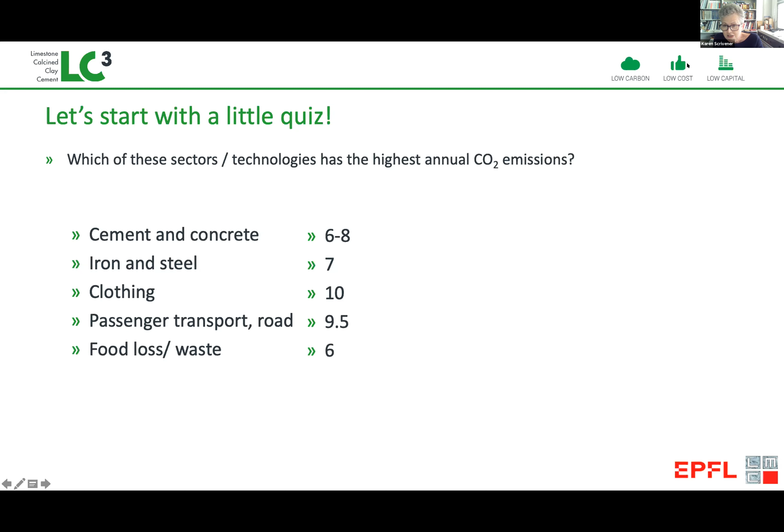Now, I'm not saying this means you shouldn't do anything on cement and concrete—just the opposite, because net zero means net zero. It means all these figures have to go to zero. But I think it just highlights where CO2 emissions are coming from and what we need to do.

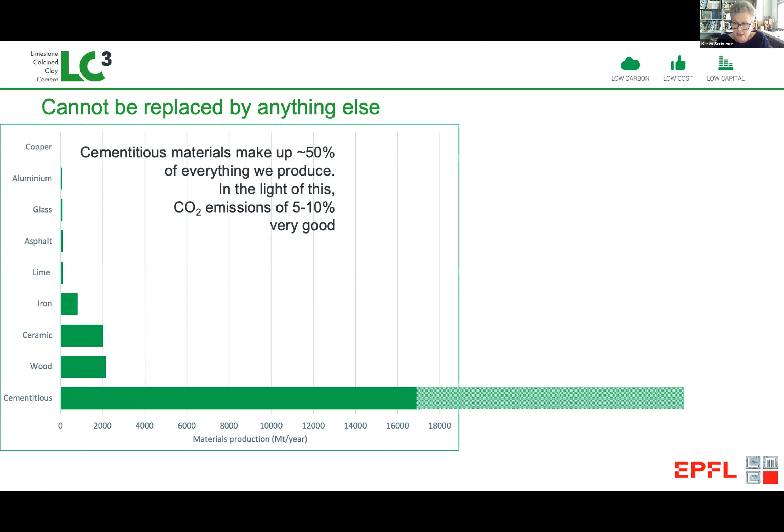Now, the fact that emissions from cement and concrete are so high is purely and simply related to the amount of these materials produced. These were quite old figures we published in our report in 2015, and I think even then they were an underestimate. Today, the estimate of the amount of cementitious materials—that's cement, concrete and mortar—is about 30 billion tons. That's certainly more than all other materials put together, and purely from a resource standpoint, it's clear we couldn't significantly replace it with any of these other materials.

I certainly don't think we should see it as a competition, because we need all materials. People want to promote timber as a solution, and timber can be a very good building material, but we have no means to significantly increase this. If we wanted to replace just 25% of the emissions from concrete with timber, we would have to plant a new forest 1.5 times the size of India.

And this, even if we could do that, which clearly we can't, that would actually have no impact by 2050, because the trees would hardly be grown by 2050. So we need to stop people thinking that timber can just solve everything if we stop using concrete.

It's simply impossible. And more importantly, in developing countries, there's still a huge demand for people to be housed decently. Just in Africa, it's predicted another 200 million accommodations or homes will be needed in the next 10 years. So this is a huge problem we have to solve.

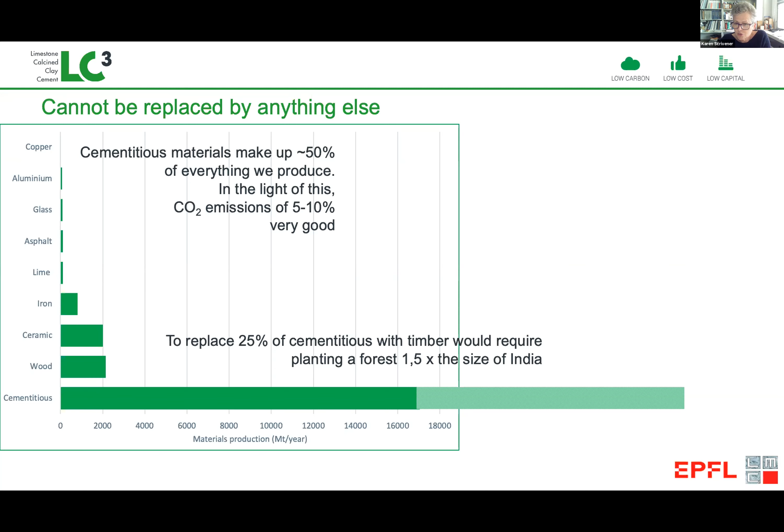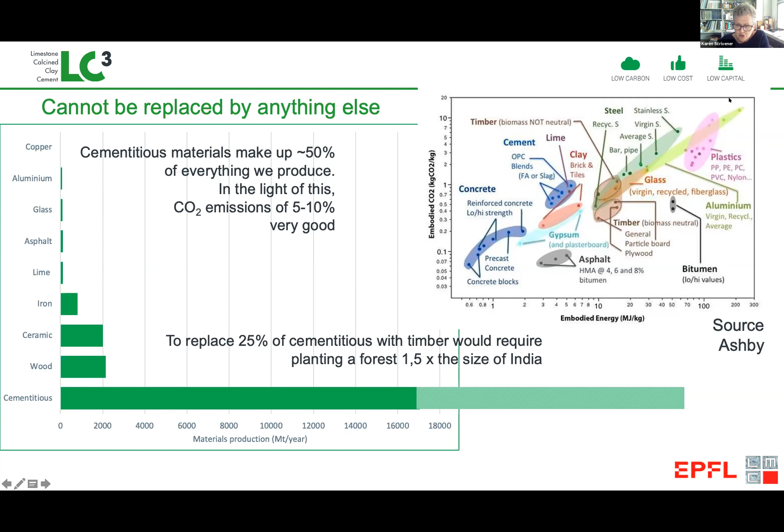And from an intrinsic point of view, we also have to realize that the embodied emissions and the embodied CO2 of concrete are some of the lowest of all materials. These figures come from the book of Mike Ashby, and you can see concrete is right down in this bottom corner. Here are metals, here is timber, here is glass, and plastics right up many orders of magnitude higher. So concrete is essential, but we can do a lot to improve it.

We made a first attempt to evaluate that in 2016 with this UN Environment Report. I think things have changed a lot in the 5 years since we brought out this report, because 5 years ago, the level of emissions reductions forecast to be necessary was quite modest. Now, because we've done nothing, we're in a much more serious situation. We have to go much further, and we really have to meet this net zero. So things are much more serious.

Now, cement is often called the hard to abate sector for the simple reason that the majority of the emissions come not from energy. So this shows you a cement kiln. It looks like a kind of rusty, inefficient old process, but that's really not true, because there's been tremendous improvements in efficiency of cement making, mainly since the first oil crisis in the 1970s.

So very simply, the oil price went up 4 times. The cement industry scrambled to use less oil. And by and large, they've been very successful in this, improving efficiency dramatically, and particularly in Europe, incorporating waste materials, so that in European countries, many plants are operating with more than 80% of waste fuels.

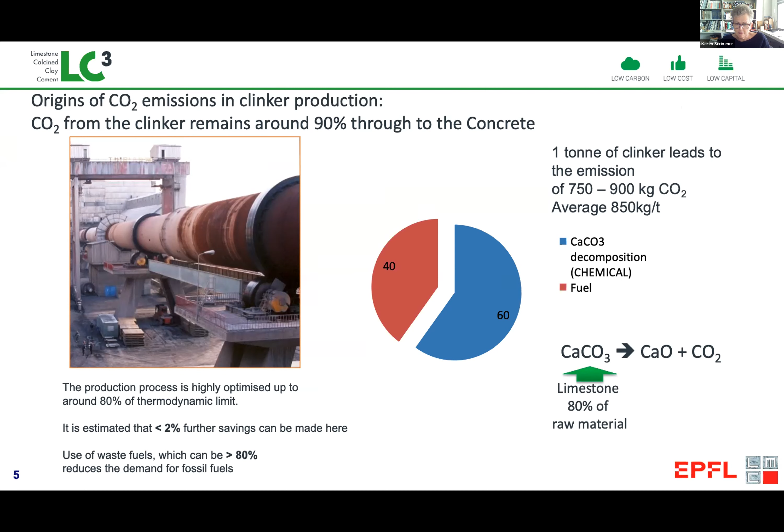So that's not so easy to solve. The other thing in terms of the context I want to highlight is that even today, and certainly in the future, a very small proportion of cement production is coming from OECD countries. We often sit around in our nice, comfortable offices and homes and consider these very elaborate, sophisticated potential solutions. That's not going to address the problem.

We're only going to address the problem if we can provide solutions that can be used by everybody, and particularly in the countries where the demands for homes is going to be so enormous in coming years.

We've seen what's happened in China in the last 30 years, such that China now consumes more than half of the world's cement. This figure is certainly going to decrease, but there are other countries coming online like India and many other countries, notably in Africa.

So today in India, the cement consumption per capita is about 5 times less than in China. In Africa, it's even half that again. So you can see the amount of pent-up demand there is in these countries.

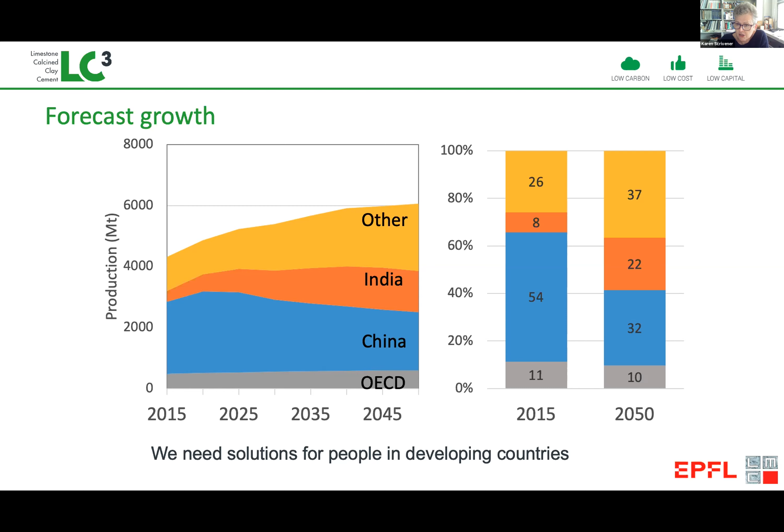And these have got to be the countries we engage with if we're going to bring about these lower CO2 emissions. So again, if we relate this back to how many emissions are coming from cement, it's incredibly varied country by country. United States, for example, which has quite a low per capita use of cement and a very high emissions in terms of energy from transport and everything like that, it's probably only about 1 or 2%.

Whereas in a country like Vietnam, which produces a lot of clinker, and a lot of that is in fact exported, it may be up to 25%.

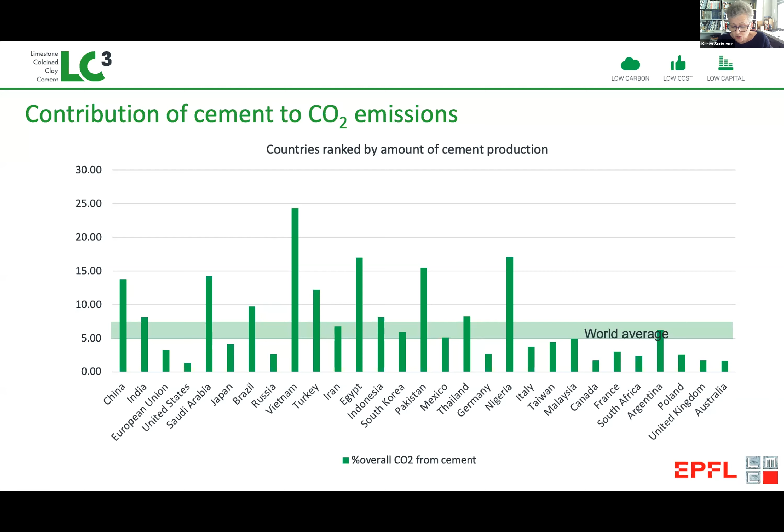I really want to stress the point that there's no one single solution. We need to work at all the different levels if we're going to reduce emissions the way we need to. This shows the value chain: we need to reduce CO2 from clinker production, which has largely been done to the extent possible. We then need to reduce the clinker in the cement, and that's mainly what I'm going to talk about today in terms of substitute materials. We need to reduce the cement in concrete, a very important lever that's been very little studied. I'll say a bit about that at the end, but we can go further.

We can reduce concrete in buildings. We can use buildings more efficiently rather than demolishing them. And of course, if we have to demolish buildings, we can recycle. Concrete is a perfectly recyclable material - the only obstacles are really cost and logistics. In technical terms, every single part of concrete can be reused. In this report we wrote for the European Climate Foundation, we calculated that if we strung together these possible savings, we could imagine reductions of up to 80%.

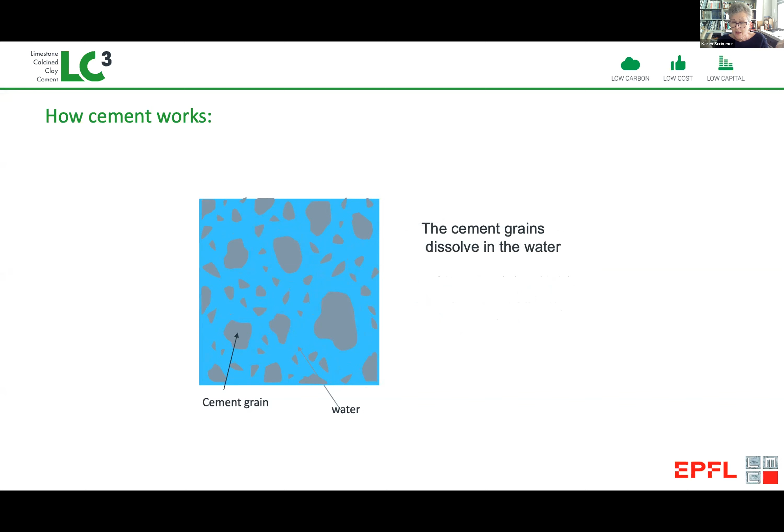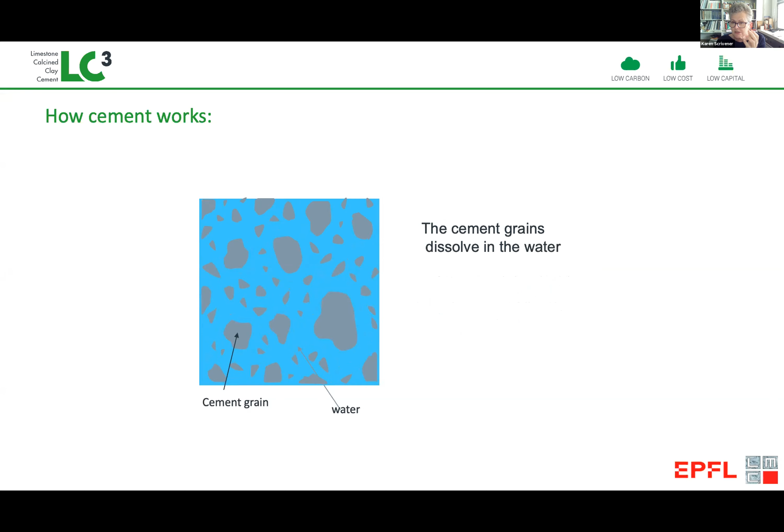What's happening is that those gray cement grains are dissolving - like when you put sugar in your tea or salt in your potato water. But it's very different from salt or sugar dissolving, because the different ions that form this cement can then make new combinations together, and these new combinations of ions can precipitate. The precipitates, drawn in red here, are what we call hydrates. And these hydrates bridge the spaces between the cement grains.

They have a larger volume than the amount of solid that dissolved, for the simple reason they incorporate the water in their structure. So water now becomes part of the solid, and this is why it increases in volume. You can start to fill in the space, but you never completely fill it in—you still have pores there. But that's what gives you this strong and durable solid.

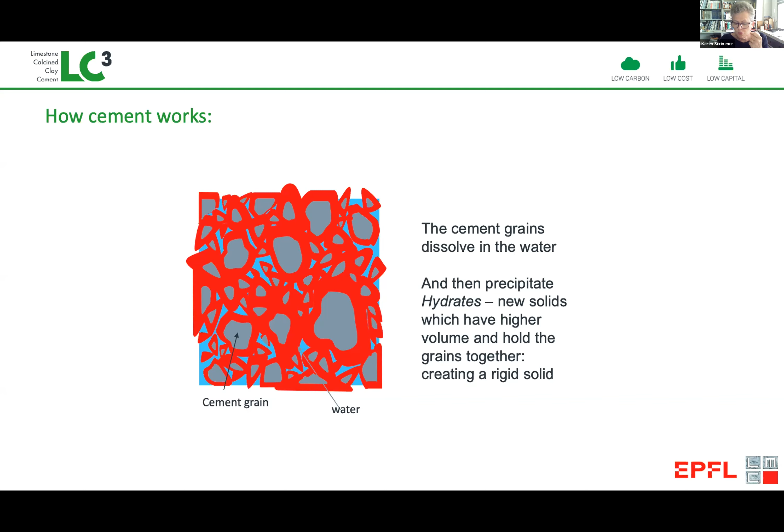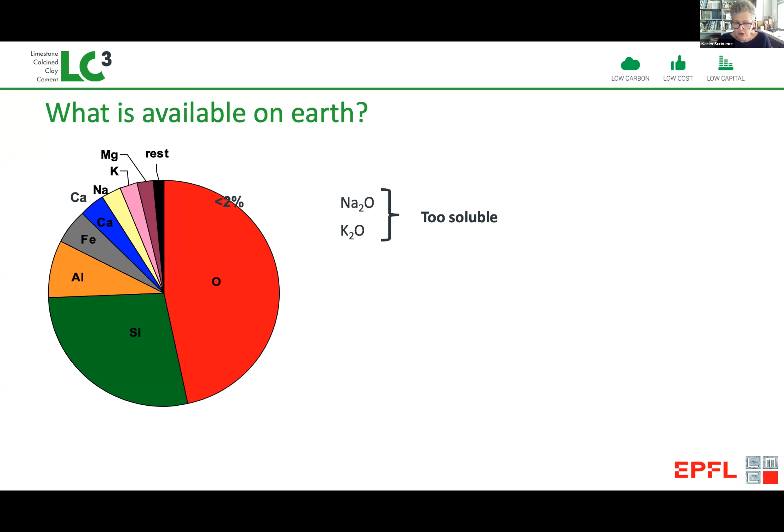So let's go back and look at these different elements. Most of these seven here are actually combined as oxides. If we consider the oxides of sodium and potassium, the problem is these are way too soluble. We know we can make strongly alkaline solutions by dissolving sodium and potassium in water, and then we don't hardly ever get precipitates.

On the other hand, the oxides of iron and magnesium are too insoluble, so they don't move around. If you examine an old cement paste, you can see quite easily all the places where the iron was originally in the cement grains, and however many years you look at it, it doesn't ever move anywhere—it just stays in the same place. So it's not really contributing to this process of filling space.

And the same with magnesium. Even when you have very small amounts of alkali present, it doesn't move around. And if we have a slag cement, the slag is basically staying in the same place.

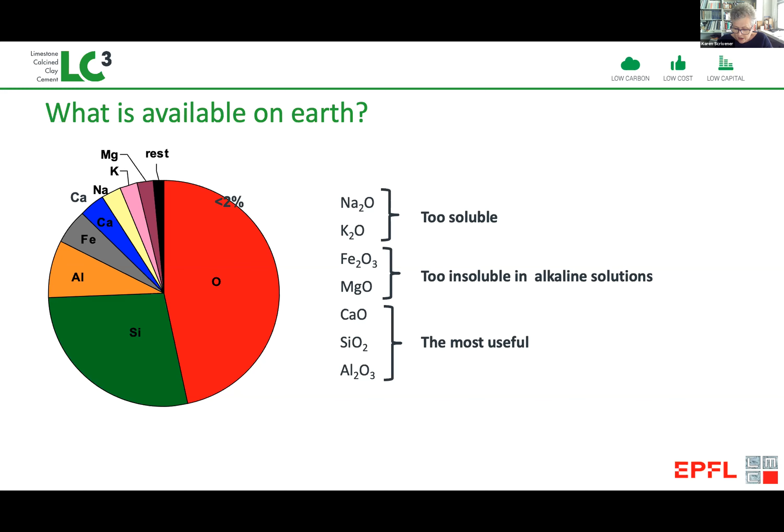So this takes us from the overall composition of the Earth to a system of just three oxides: calcium oxide, silicon dioxide, and alumina. We know this system very well—it's been studied for more than 100 years. And we know that basically there are only two areas of this diagram where we get cementitious materials: this region here, which we call Portland cement, basically calcium silicates, and this region over here, calcium aluminates and calcium sulfoaluminates.

At first sight this appears very interesting because it's much further from the calcium oxide corner, which means you need less limestone. Less limestone, of course, means less CO2. If you produce cements in this region, they can have CO2 emissions some 20 to 30% less than Portland cement.

However, life is not so simple, because to produce compounds in this region we need much higher concentrations of alumina compared to silica, and these minerals are much rarer. We have bauxites, but bauxite is used to produce aluminium, and even if all current bauxite production was diverted, we would still only replace 10 to 15% of current demand.

And then people say, well, there's lots of waste products with aluminium in. That's true, but what people call lots in terms of waste is often very, very small in terms of cement production—and that's the case here. The kind of waste streams that contain the amount of alumina needed are available in quantities which are absolutely minuscule compared to the world demand for cement.

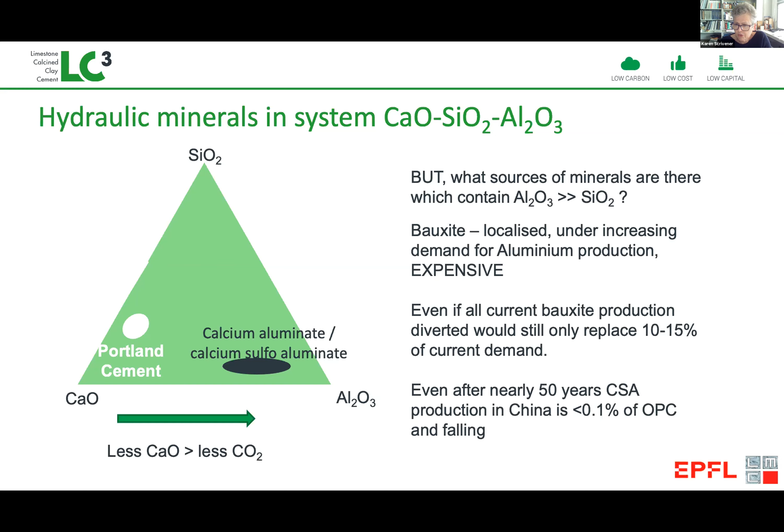I think we see the proof of this: these cements were pushed very strongly in China from the 1970s, but today production in China is less than a thousandth of Portland cement production, and it's actually going down—and that's without talking about the many technical difficulties of these materials.

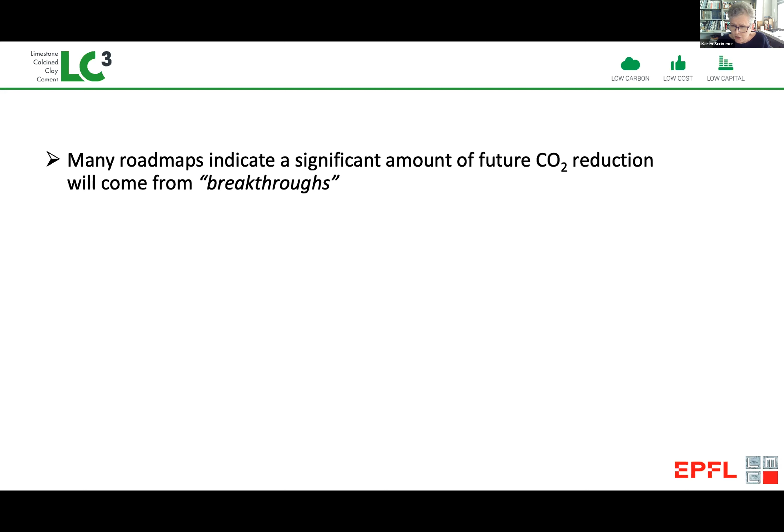So what other possibilities do we have? This is a bit the problem—all these roadmaps people come up with try to evaluate what can be done, and there's always some gap. So they say, well, we're going to have some wonderful breakthrough in the future, or we're going to do carbon capture and storage, which is fine. But what breakthroughs can we really have when we know the composition of the Earth, and clearly that's not going to change?

If we consider cement as a solid material, I think imagining there's something out there we don't know about verges on magical thinking or alchemy—that we can suddenly transform these common elements into something else. We have to realize people cannot live in nano or virtual houses. We've seen tremendous advances in the miniaturization of electronics, but exactly the opposite in terms of houses—people want to live in bigger and bigger houses rather than smaller and smaller ones.

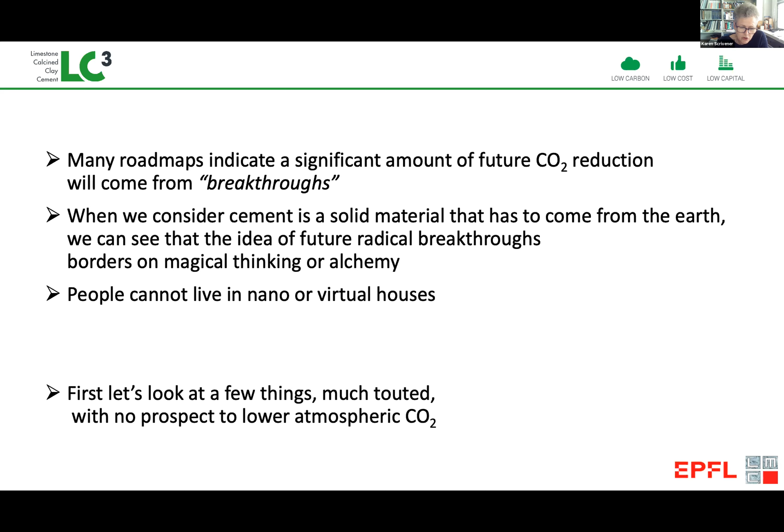There's frankly a lot of ideas going around which border on untruths. One of the most common fallacies comes from this cycle we have.

We have limestone, and most of the Earth's calcium is tied up as limestone or other minerals, which is very difficult to separate the calcium from. During production, that breaks down and gives off CO2 into the atmosphere. Then we have the hydration process, which forms calcium hydroxide. Over time, those hydrates will reabsorb CO2, and the concrete carbonates. But it's fairly clear that the amount of CO2 reabsorbed can never be higher than the amount that was given off in the first place.

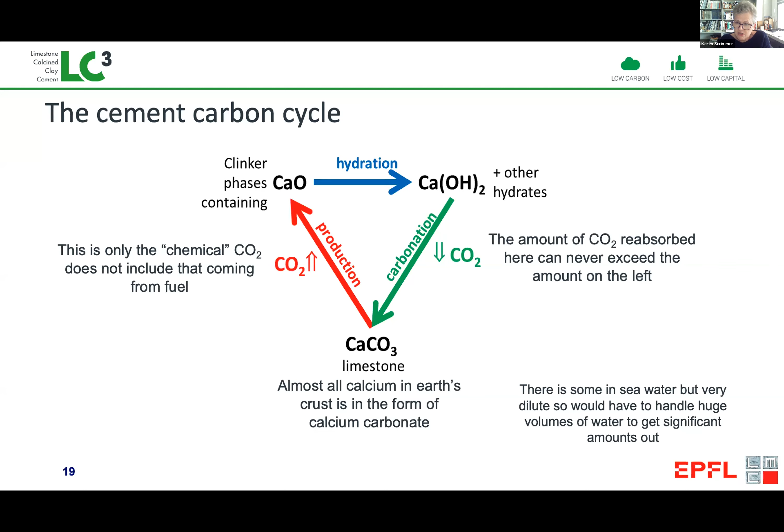Worse than that, we're now in a very urgent situation where we have to reduce to zero in the next 30 years. This carbonation process is very slow, taking tens or hundreds of years. So it's going to have very low significance in the timescale we're talking about.

So there are people who come along, and these people have had very good finance for their projects, based on the idea that if we add calcium oxide or calcium hydroxide to cementitious materials, it will react with more atmospheric CO2. And it will. But where do you get the calcium oxide or calcium hydroxide from? Basically they all come from limestone, and they've given off their CO2 in the process, and they're never going to absorb more than they gave off in the first place.

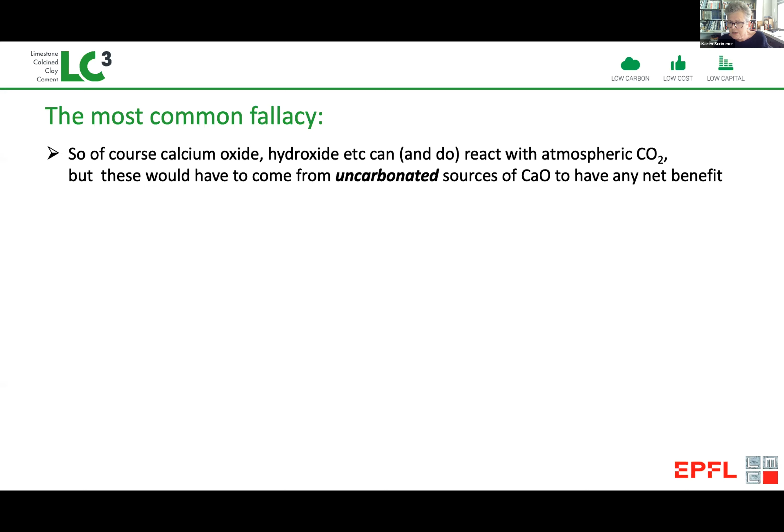People talk about uncarbonated sources of calcium oxide, and we're making some attempts to evaluate that. But even on a first look, you can see these are really tiny amounts. It's the same problem as alumina waste - you have quantities, but they're really small and won't make a significant difference on world CO2 emissions.

Then we have people who come up with even more elaborate ideas. They say, this is wonderful, we have these microorganisms, algae, bacteria, which can take CO2 and form calcium carbonate. And this is true, there are a lot of these organisms. This is the way limestone formed in the first place, over millennia, by organisms fixing CO2 in their skeletons. But of course, to fix CO2 in their skeletons, they also need a source of calcium.

So if you take these bacteria into your factory and try to get them to produce calcium carbonate, you have to feed them a source of calcium hydroxide or calcium oxide. And the same argument applies - where do you get that calcium oxide from? Whenever I explain this to people, they all understand it very clearly and even laugh that people can come up with such ideas.

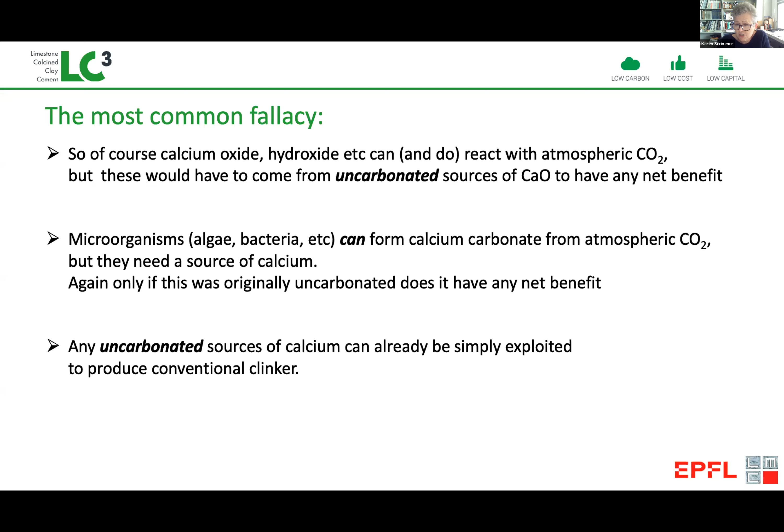But I tell you, there are many, many companies out there peddling this as a solution. And if you do have sources of uncarbonated calcium, you actually can use them very simply just to make cement and reduce the emissions from the cement.

Then we have alkali activated materials. I'm not going to go into these in detail, but the problem is they're generally based on slag or high calcium fly ash. It's only the ones with some calcium content that really work in the field at room temperature without very high amounts of alkali. The basic problem is that slag, for example, we have only 8% compared to the demand for cement, and 95% of that is already used in cement and concrete.

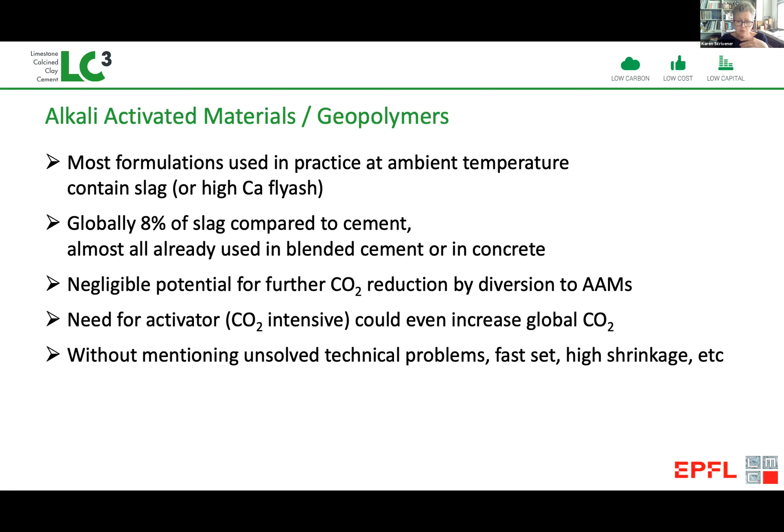So if we divert some slag to producing alkali activated materials, it's true that particular material may have lower CO2 emissions, but overall worldwide we've done absolutely nothing. In fact, we've probably increased CO2 emissions because we had to produce the alkali activators to use these materials. And that's without talking about any technical problems which still exist. I hate to say it this bluntly, but we've really wasted billions of dollars on these technologies over the years.

So when we look at all this, we really have to face the fact that Portland cements will continue to dominate. And the way we can reduce CO2 emissions really dramatically is, of course, to replace the clinker with other things.

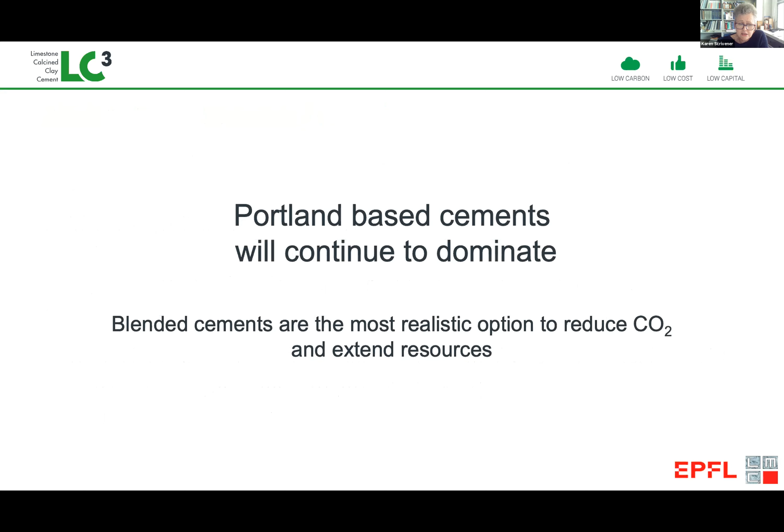Slag, similarly, because we're recycling more steel, which is of course very good. The more steel you're recycling, the less you have to obtain from iron ore. And eventually we're going to see other methods of reducing iron ore to iron, which can be done, for example, with hydrogen, which is a very good prospect. So slag is going to disappear.

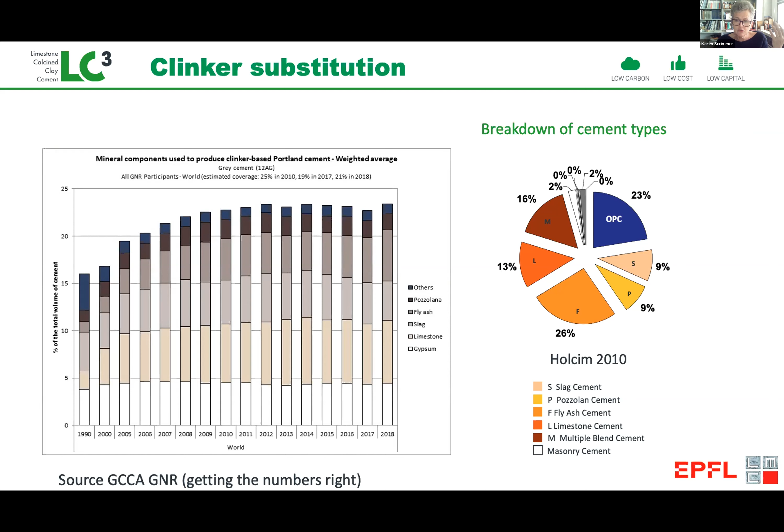Most of the cements in the world today are in fact blended cements. Some countries, notably the UK and North America, like to add these additions at the concrete level rather than the cement level, but it amounts to the same thing. Slag and fly ash are disappearing—they're only 15% of cement demand today, and they're not available in those countries where demand is going up most strongly, like Africa.

People have studied a number of other things like vegetable ashes, for example. The long and short of it is that these are really small amounts of material. They can be used, but they're not going to make much of a dent in CO2 emissions.

Limestone, of course, we have a lot of, but the problem with limestone is that it only reacts a little bit in normal cements, so when you have additions above about 15 to 20%, it just becomes a diluent, and then you end up having to use more material in the concrete.

So the thing that can really change this—in fact the only thing that can really change this—are clays which you can calcine. This is what we realized some 15 years ago, and we started to work more on calcined clays. Of course, calcined clays were known, it wasn't completely original by any means—it's well known that clays, when you heat them up, become very good pozzolans.

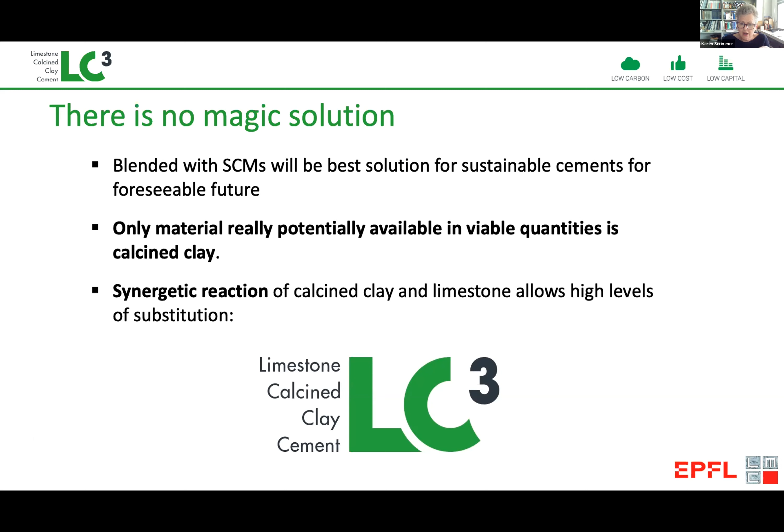But what we found out, which was really a game changer, is that we could have this synergistic reaction between calcined clay and limestone. Because of this synergistic reaction, and the fact that limestone is a very low CO2 material, you could actually go to very high levels of substitution and high levels of CO2 reduction.

So this LC3 technology, as we call it—LC3 stands for limestone, calcined clay, cement—is actually a family of materials. We often use a number like 65 or 50, which represents the amount of clinker.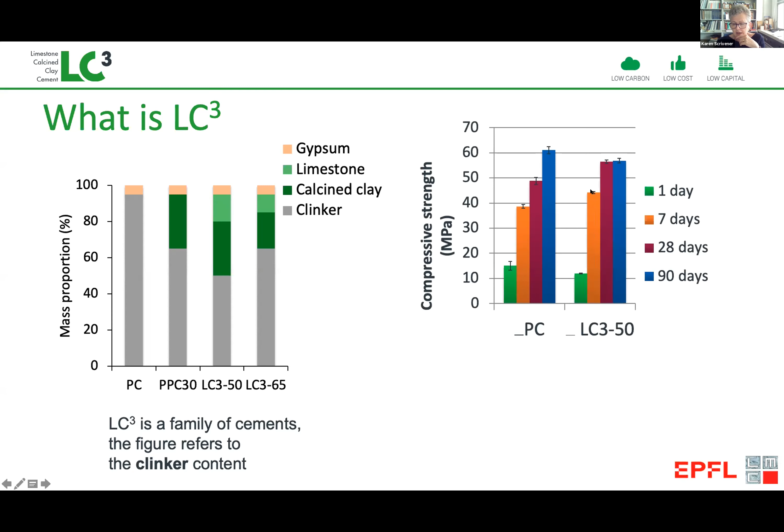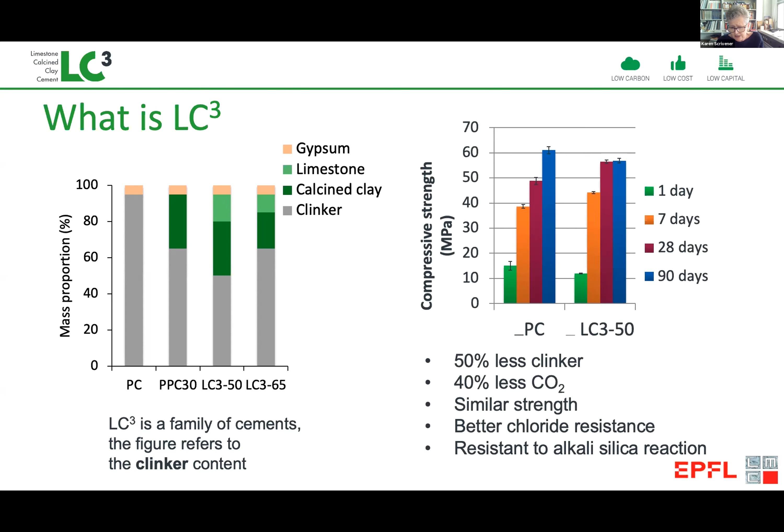If we take this LC3-50 and just mix the materials together in the lab, we see slightly lower strength at 1 day, but by 7 days the strength is higher. That's just mixing together in the lab, but if you do it properly in a cement plant, you can get even similar strengths at 1 day. So we've got 50% less clinker, 40% less CO2, similar strength, better chloride resistance, and resistance to alkali silica reaction.

We can get these high replacement levels because of this layer structure of clay. It's not like slag or fly ash, which are glassy materials—it has this layer structure. The kind of clay we need, which is kaolinite, has this one-to-one structure with one layer of silicon and one layer of alumina.

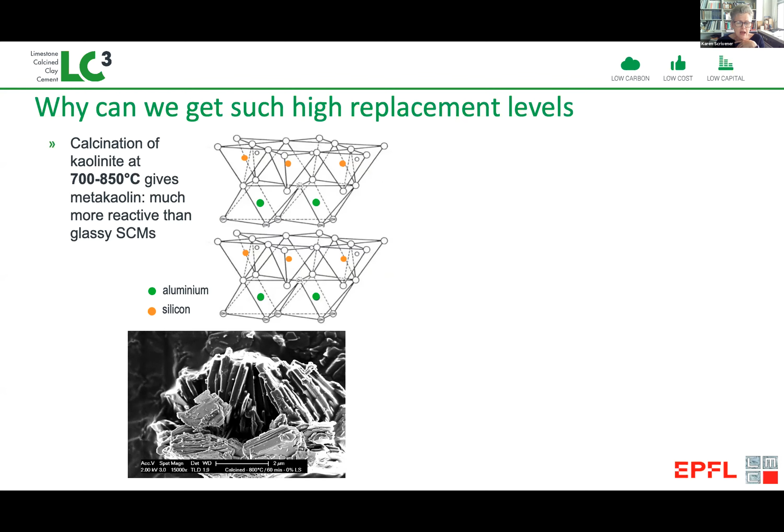When you calcine it, you disrupt the structure, and both of these can be available. It's particularly this alumina in the metakaolin, with its disrupted structure, which can react with limestone to give space-filling hydrates.

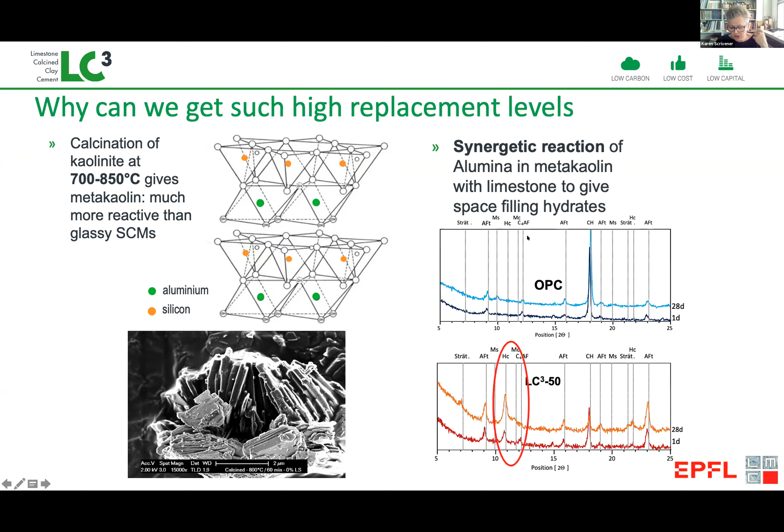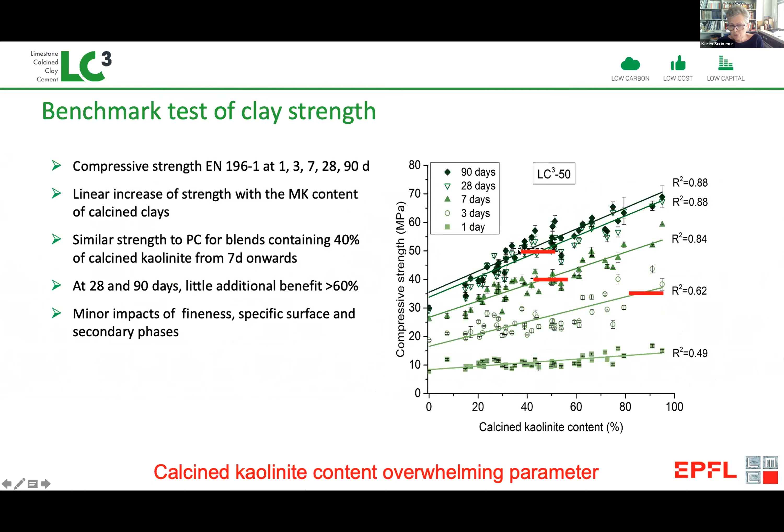We've now tested more than 70 clays from around the world. We find that the parameter that really determines the strength development is the kaolinite content. These red lines give the reference strength of Portland cement.

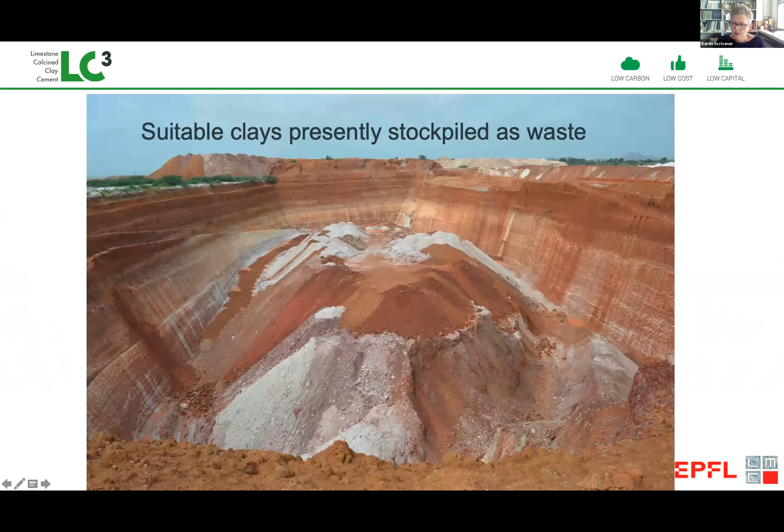And often in these countries, they're actually waste streams. This is a quarry from India, where this clay from the overburden is not suitable for the original purpose, but very suitable for making cements.

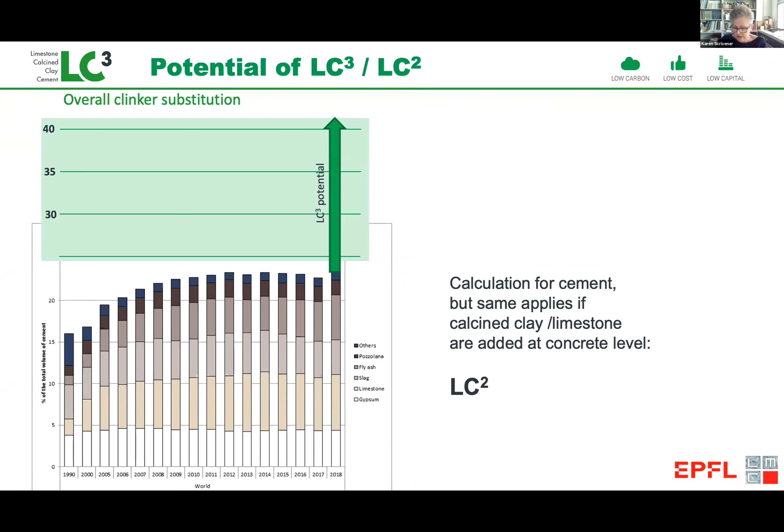So if we go back to this figure from the GCCA members, and imagine that instead of the clinker substitution level stagnating at about 20%, we could easily go to a substitution level of 40%, then we would save 400 million tons of CO2 per year.

And I think this is a conservative estimate. I think we could actually save maybe double that.

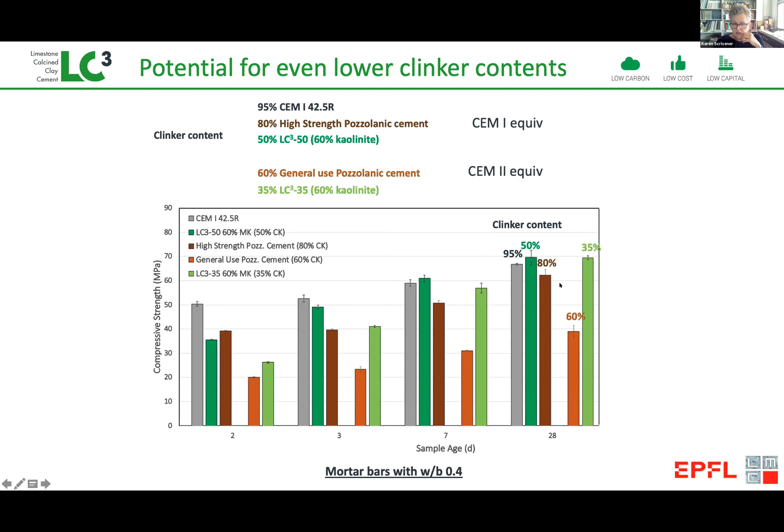So this is not just a nice idea in the lab, it's being produced full scale.

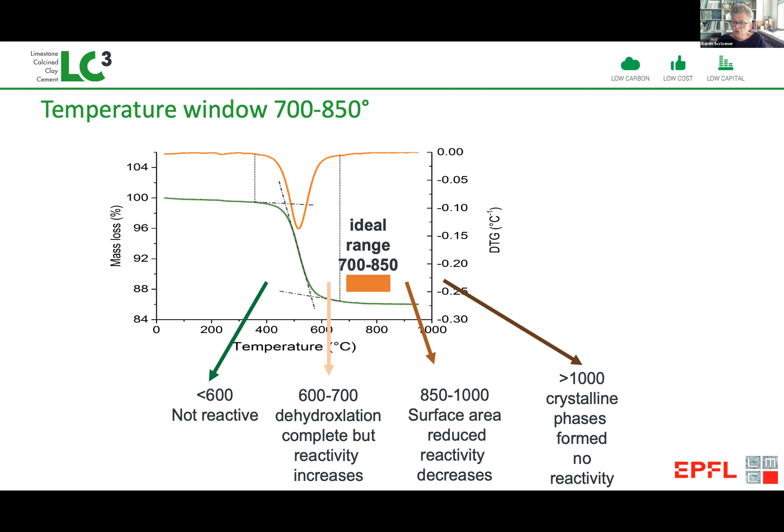In terms of calcination, we have to get the good temperature for calcination, around 700 to 850. Of course, this does demand some energy, but the CO2 emissions from calcining clay in a conventional manner are less than a quarter of what you have from producing clinker. And because of these lower temperatures, it's a technology that could be relatively easily electrified.

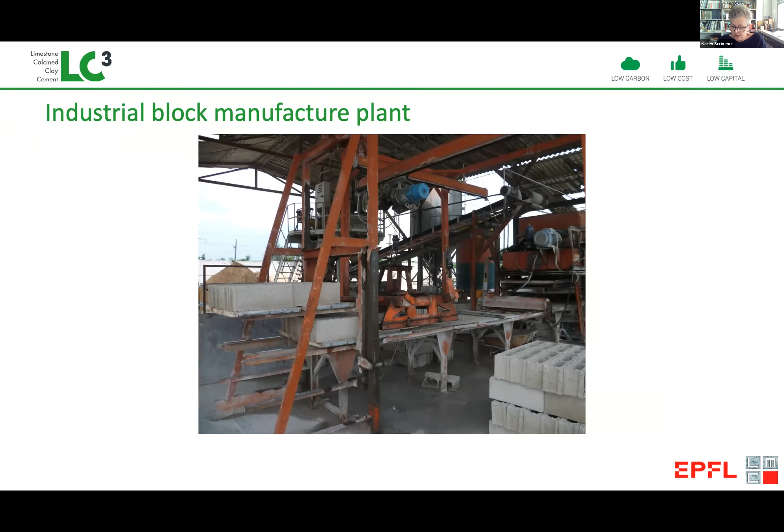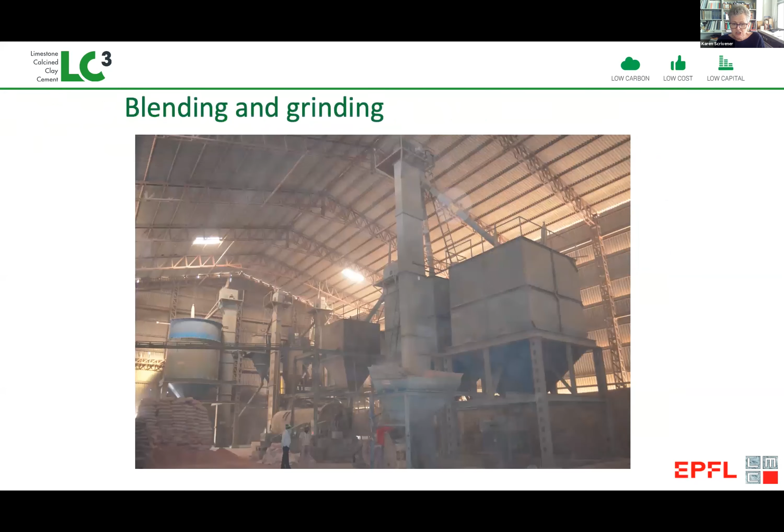Then we made a production in India, again making blocks and pavers, and we built this house, which is all out of LC3. With this one house, we could save 14 tons of CO2.

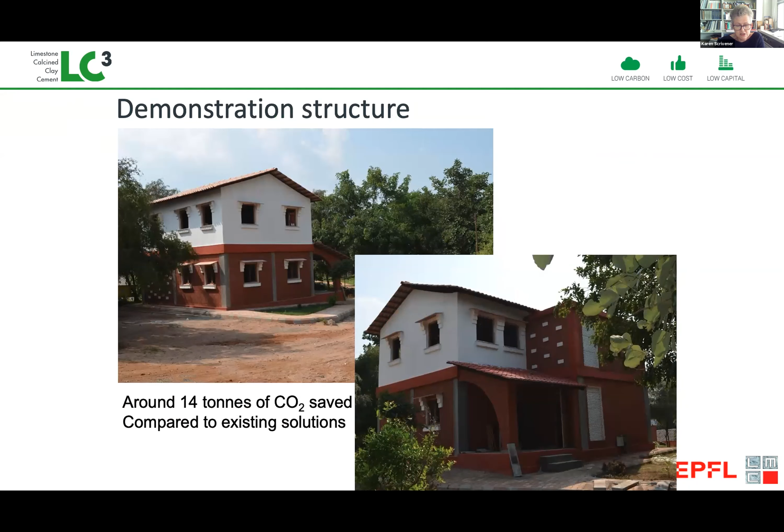We also did demonstrations in more demanding applications like precast hollow core slabs. We could meet the demand.

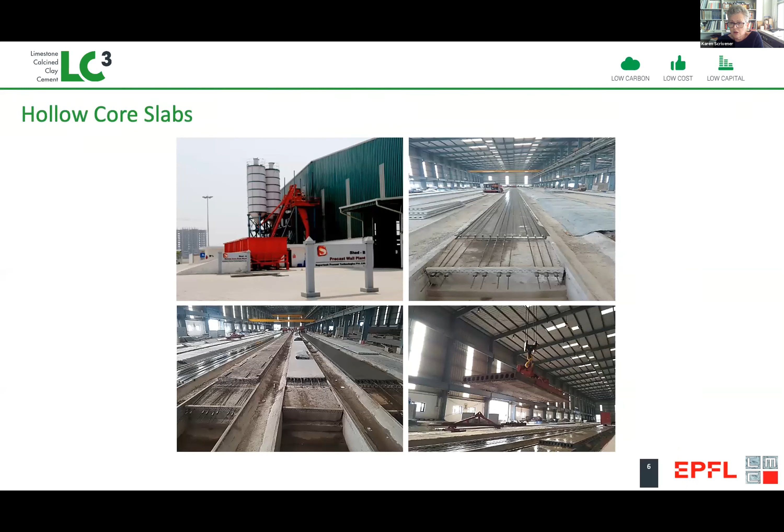Just to look briefly at some advantages and disadvantages, one thing people throw their hands up in horror about is the color. People say people are not going to buy red cement. Well, you could say if it's lower CO2, that should be an advantage.

People are worried about carbonation. Yes, like all blended cements, it will carbonate faster, but the data we've got so far show that you can still ensure good service life according to all the kind of norms around. So it's good in reasonable exposure conditions.

Workability - here you can see very, very good workability. Normally you would have to use a slightly higher amount of superplasticizer, but the good news is that admixture companies are now coming out with new superplasticizers, and these perform much better. And you get very, very good cohesion.

So for example, if you have a self-compacting formulation like here, your overall admixture demand may be lower.

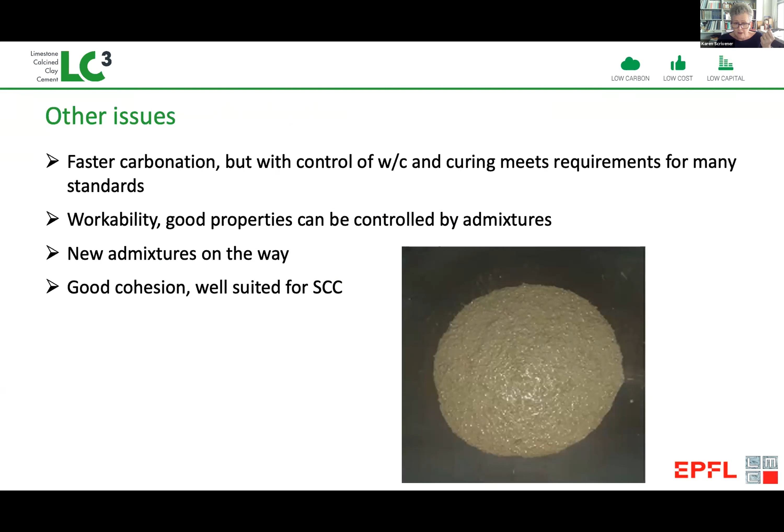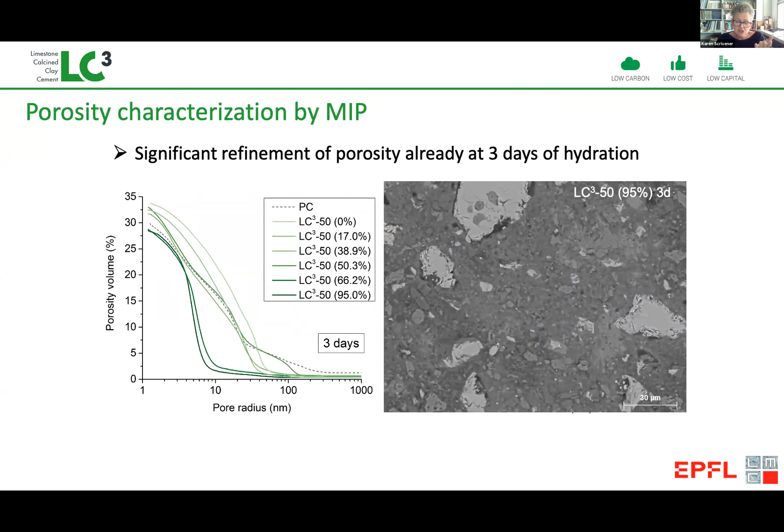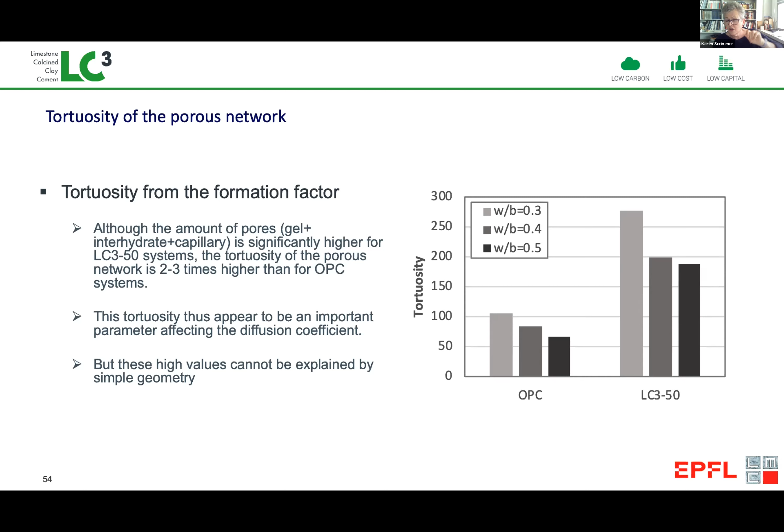People say this is due to pore refinement. This is actually not quite true. Then they say it's due to tortuosity. But you have to remember tortuosity is defined as the ratio of the transfer in a pure solution to the transfer in the sample. So it's kind of a circular argument.

You should not think that tortuosity is to do with a tortuous pore network. Here's the simple idea of tortuosity, that the path an ion has to take in this pore is longer than going straight through. That's true, but that's a tortuosity of about 4. To get tortuosities like in the last graph, around a few hundred, you would have to have a pore that went kind of like this, but that's impossible because you'd have other pores like this, and in the end you could go straight through.

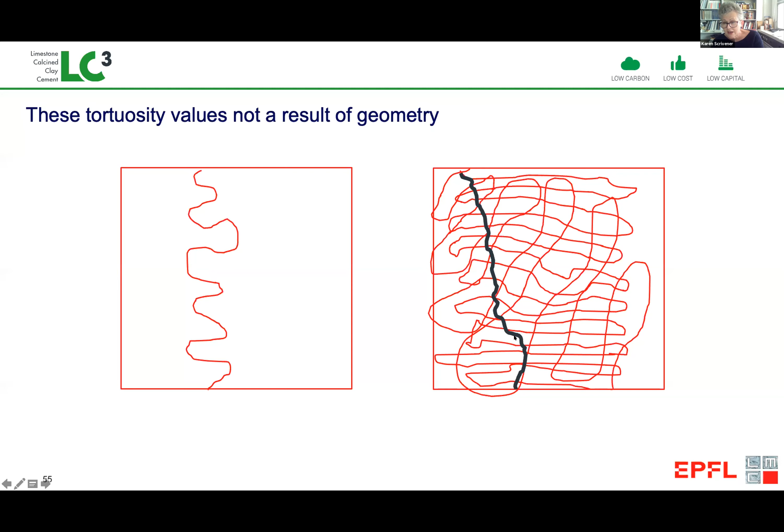So what is forming these very, very low chloride diffusion is actually much more subtle and much more interesting. You can't even really get a good idea from mercury intrusion curves, because this shows mercury intrusion curves, but then you have to think about how many of these pores are actually saturated.

No concrete in real life is completely saturated. And even at relative humidities of like 90%, the large pores are empty, so that only the pores smaller than about 7 nanometers still contain solution.

And now we have to think, we have these 7 nanometer channels between these complex surfaces of CSH. What is really happening is that we have interaction of the chloride ions, which slow down their migration due to these surface effects we don't yet well understand.

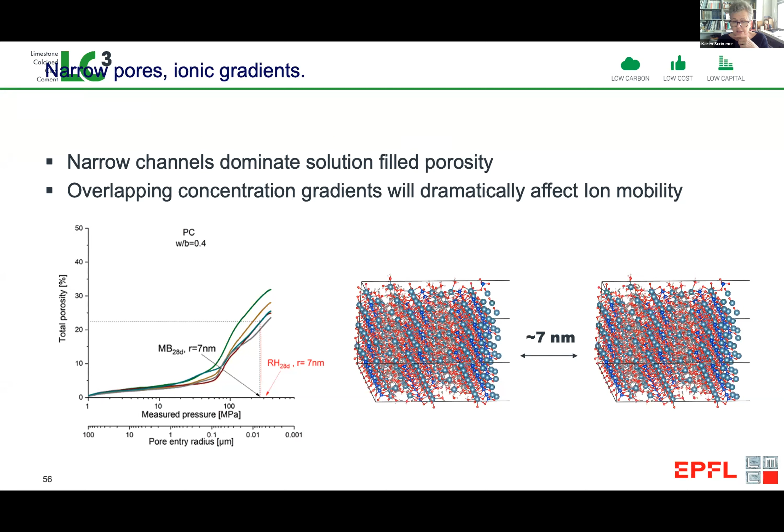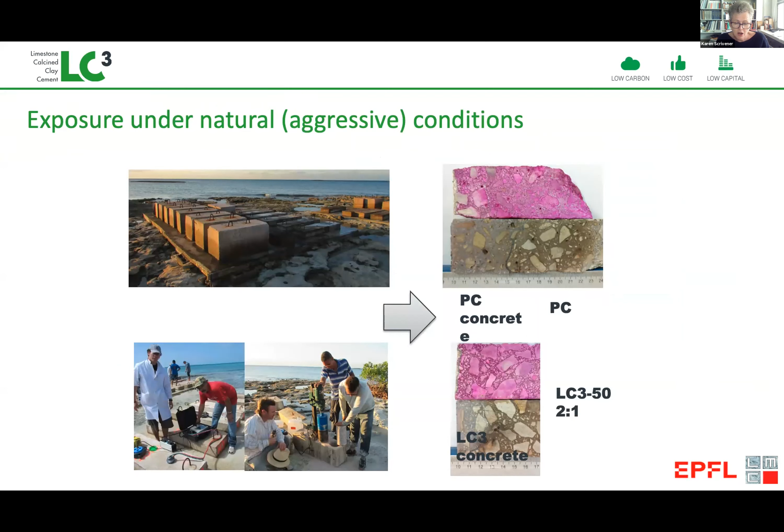We can get these properties much better in the field because we have a much faster reaction. And here's the proof in our exposure site. No alkali silica reaction, certainly at the higher levels, because we produce small amounts of alumina in solution. And best of all, you can actually save money.

This is actually what's going to be the main driving factor in this technology, because despite the fact that the planet is facing this climate crisis, unfortunately, business is business and people have to make money. And what's really going to drive people to take it up, particularly in places like Africa, is the fact they can save a lot of money.

We published a report, available online, which shows these calculations for an integrated plant, but also for a grinding plant. That's particularly interesting in Africa because they don't have a lot of limestone deposits. They can't make a lot of clinker. Most of clinker is imported, and therefore it becomes very expensive.

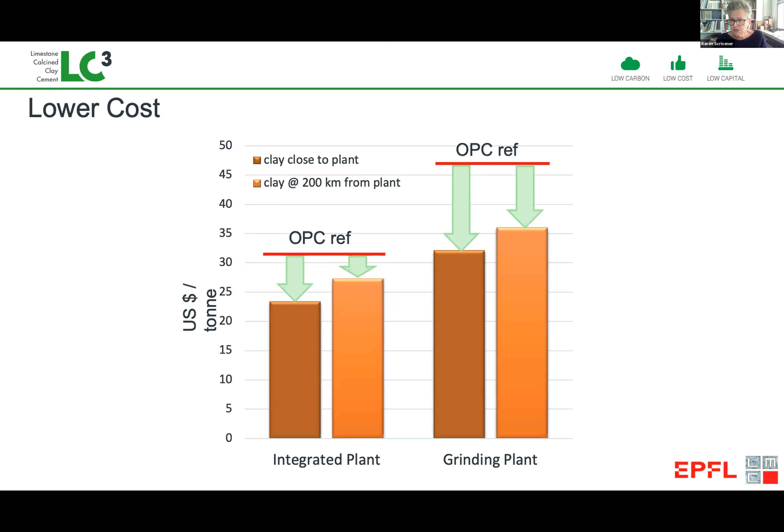I had a visit yesterday from somebody who runs grinding stations in Burkina Faso, Togo and Cote d'Ivoire, where they're paying 3 or 4 times for clinker what a cement manufacturer does by producing it himself. And therefore, if you can locally produce clay, you can save a lot of money, but you can also save a lot of this transport of materials and loss of foreign currency for these countries.

So now we're engaged with companies in more than 40, 50 countries worldwide. We have the first productions coming online in Colombia, Ivory Coast, but I think in the next few years we're going to see an exponential takeoff. We know trials are taking place in France, Germany, UK, Switzerland. Very soon, 2 to 3 years, this is going to be available everywhere.

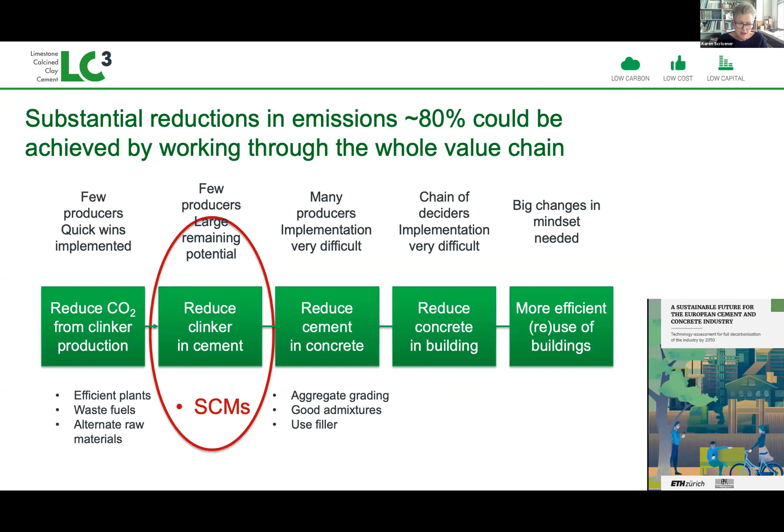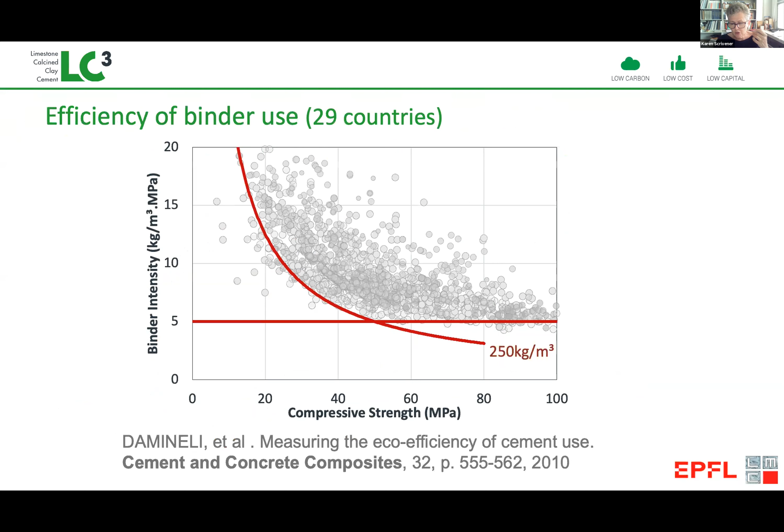I know I'm running out of time, but I just want to finish by coming back to this slide and emphasizing this is not the end of the story, because we have to go further. We have to follow these steps through reducing cement in concrete. And this figure we had in our UN report shows the huge dispersion of the amount of cement used to produce exactly the same concrete. I'm going to skip over these slides here and come to my conclusions.

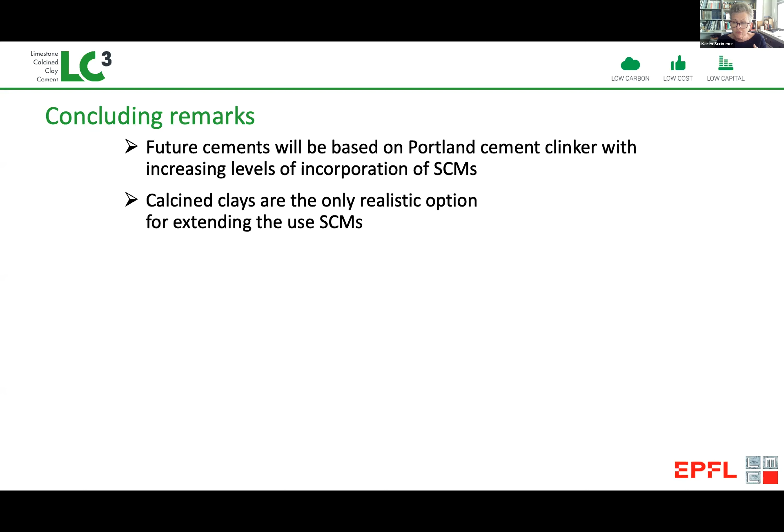So what I really hope you can take away from this presentation is that we can't run away from Portland cement clinker. We're going to be stuck with this, and we're going to have to do carbon capture and storage to some extent. But we can achieve a lot in the meantime, and we can do it very fast and at very large scale by incorporating supplementary cementitious materials, particularly calcined clay, because moving forward, this is the only realistic option to extend the use of SCMs. And we can get good, very similar properties to CEM1 with up to 50% replacement, even higher replacements if we want lower grade cements.

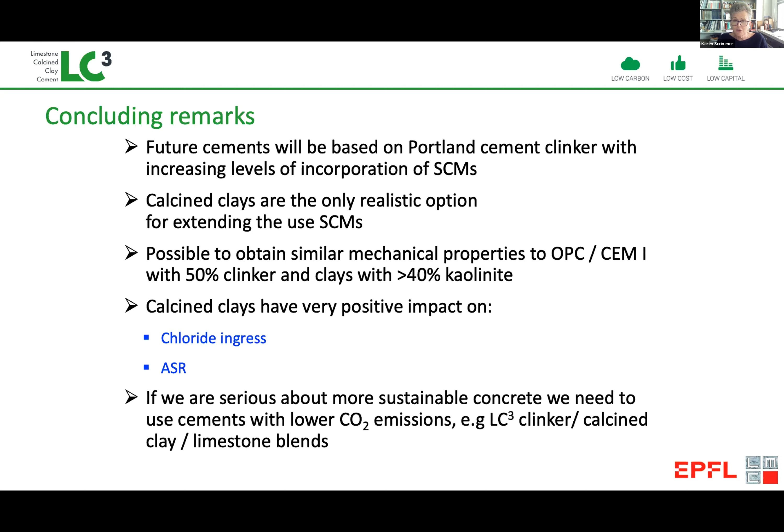And we have a very positive impact on chloride resistance and ASR. So I think this is something we've got to get serious about. We now see, after me peddling this message, pushing this message for many years, it's really starting to catch on, and lots happening. Everybody says to me, where can we get it? And I have to say, wait, but now I can confidently say that in 1 or 2 years, you will be able to get this everywhere. So I'd like to thank you for your attention, and hopefully you have some questions.